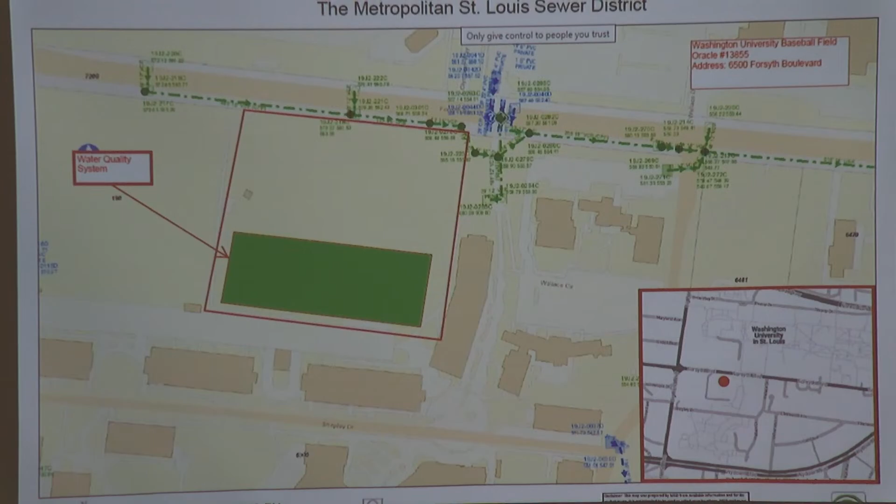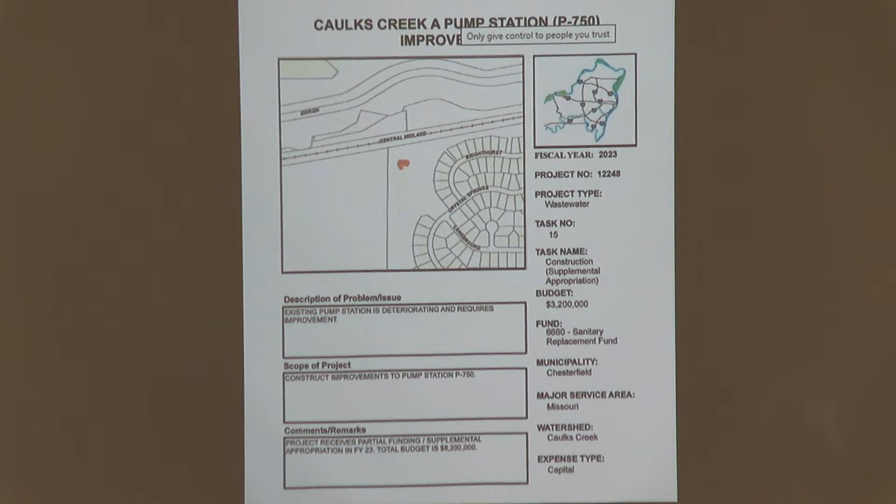The next is the Caulks Creek A pump station improvement. This appropriates additional funds to an ongoing construction project with Plocker Construction. This was a planned appropriation, it's the second year we've appropriated the project over 2 years. The work to be done consists of construction of a new submersible pump station and general upgrades to electrical and mechanical control systems. The purpose of this project is to replace and rehabilitate an aging pump station and the associated systems. Again, this is a partial funding request. This appropriation of $3.2 million will bring the total appropriation of the project to $8.2 million and fully fund the construction for the project.

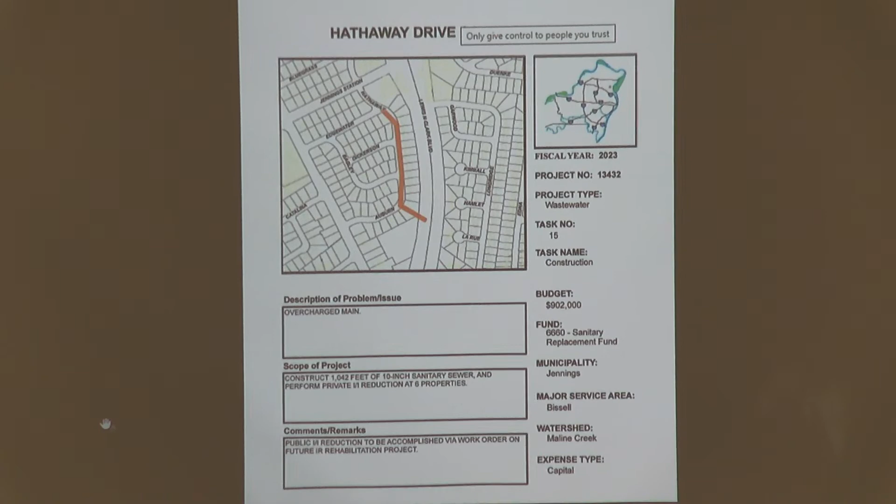Next project is the Hathaway Drive Sanitary Relief Project. This action appropriates funds and authorizes staff to enter a construction contract. The work to be done consists of construction of approximately 1,000 linear feet of sanitary sewers 8 to 10 inch in diameter. The purpose of the project is to alleviate wet weather surcharging of the sanitary sewer and reduce building backups. The district received 5 bids on this job.

The low bid was from Gershenson Construction Company. The bid was below our design estimate, and the appropriation of $1 million is just above the original budget for the project. Gershenson is committed to 17.12% African American participation on the project, which meets our 17% goal.

The next item is the Infrastructure Repair Rehabilitation Contract A project. This action appropriates funds and authorizes staff to enter a construction contract. The work to be done consists of rehabilitation of approximately 29,000 feet of sanitary sewers, varying in size from 6 inch to 72 inch in diameter using the cured in place pipe method. The purpose of this project is to reduce infiltration into and rehabilitate older, damaged, and deteriorated sanitary sewers throughout the district. Sewers identified for rehabilitation are identified through the annual CMOM inspection program required by the consent decree.

The district received 1 qualified bid for the project. We actually had 2. The second low bid was found to be non-responsive to the MWBE requirements. We went with the 1 qualified bid, from SAK Construction. The bid was slightly above the designer's estimate, and the appropriation of $2.9 million is above the original budget on the project.

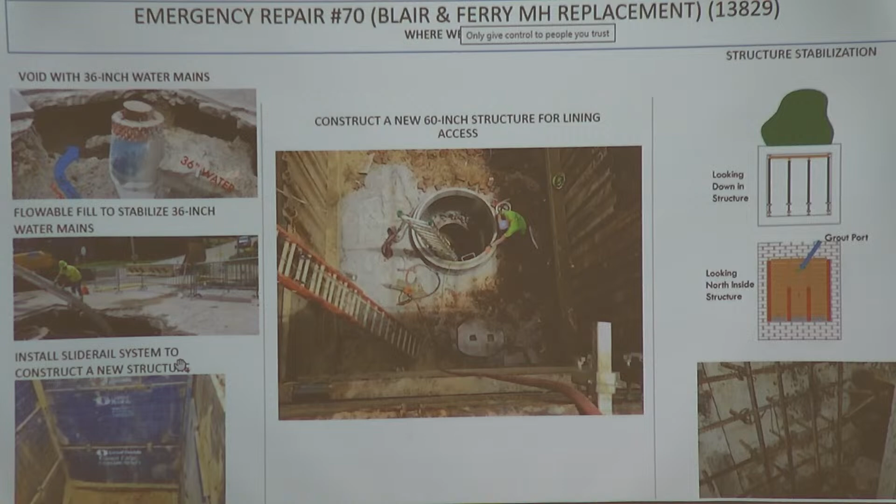The work under this appropriation consists of numerous items: excavation of an 18-foot diameter shaft, 36 feet deep, tunneling of two liner plate shafts to connect the 18-foot diameter shaft to the existing upstream and downstream sewers, bypassing the existing manhole structure, and several other items including backfill and restoration, replacing 4 inlets to be installed and connected to the new 48-inch manhole, and connecting an existing lateral to the downstream liner plate. This supplemental request of $2.5 million will bring the total appropriation on this project to $4.5 million. We also have some drawings on it.

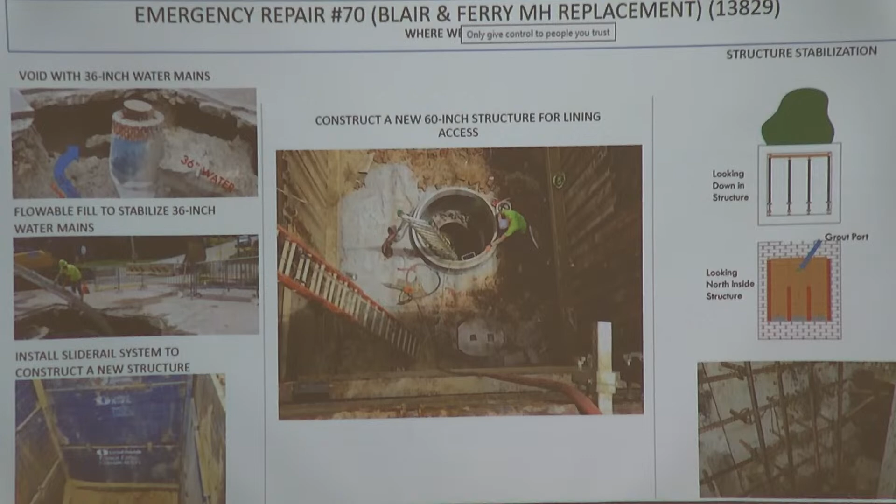On the first slide, it kind of shows the previous repairs that the district had made. Upper left was the original collapse, and there was some flowable fill put in to stabilize that. Working down on the left-hand side, the lower part is the shoring that was put in to make the repairs on the structure. The picture in the middle shows rebuilding that structure and moving forward. There's a few items that got cut off on the right.

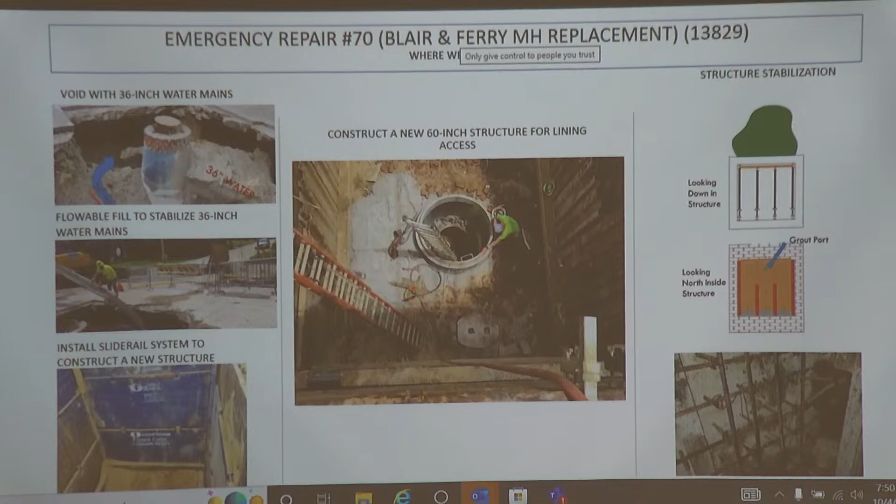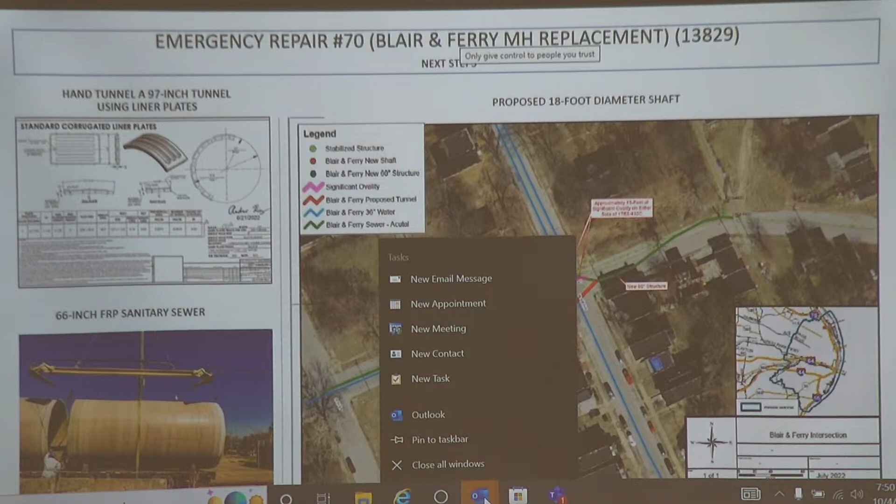On the next sheet is the plan of action for the sewers. Looking at the large picture on the right, there are 2 little highlighted sections, on my sheet it's purple. The sewers, which are supposed to be round, are starting to collapse and have become egg shaped, flattened out, which is a sign of imminent collapse. So that's what we're going to repair.

We've had some geotechnical work done in the area around that manhole, and in order to avoid the bad soil conditions, we're going to tunnel, which is the dark red line to the south. Basically, we're going to build a shaft in the middle and then tunnel in 2 directions from that and reconnect, then totally abandon that existing sewer, which is collapsing. That's what the $2.5 million is for. The bottom left shows the type of pipe we'll use once we put the liner plates in and reconnect that.

Hey Rich, how old is this sewer? Is it 100? What do we figure, 100? How many of those do we have out there?

I don't want to guess, but I'd say a good portion of the city of St. Louis was built in the early 1900s, particularly the older brick sewers, the larger diameter ones. This particular sewer was actually rehabilitated in the 70s, and we were able to locate some old plans that identified the issues they had with the ground conditions when they built this sewer, which causes it to snake around some of the bad conditions they had at the time.

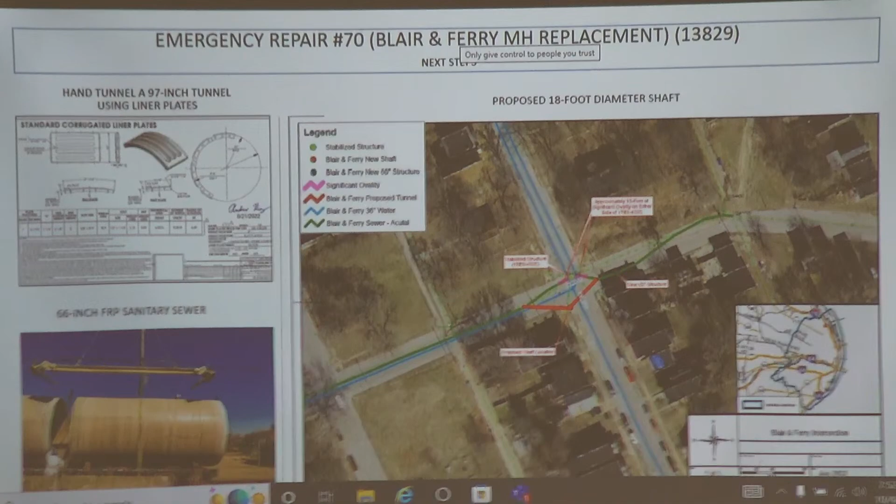Is there any way—do we have a good inventory of what's out there, and are we planning this into the CMOM program? Yes, we do investigations of them. Some of the more critical infrastructure, for instance those brick sewers within the floodplain of the Mississippi River that backs up, have already been reinforced and relined.

There are a lot of brick sewers around. Brick sewer was a good method of construction in the past. The problem is it really depends on the stability of the surrounding soils. A lot of things can happen—those soils, work above, groundwater changes. For example, leaking or partially leaking water mains can cause issues.

So we're in a process. We do an investigation going through and seeing what's there. Probably the best way to try and see if something's going on is trying to observe voids or other things happening outside the brick sewer. That's difficult to get to. We've tried different technologies over the last 15 years, and monitoring the shape turns out to be the best way we can get at it.

A lot of the worse ones I think we've taken care of, but this is still going to happen on occasion. So do we know there are more that are going to do this? Probably the best thing is for us to keep watching it. We don't just chase individual issues either—we evaluate whether we should be rehabbing longer stretches as a preventative measure. So it's a little bit of smart guessing as to where some of this is going to happen.

Rich was indicating the sewer system started in the 1860s, so it's been quite a while that some of this has been in place. But we have a program to monitor these things and replace or reinforce them. If it's not brick sewers, it's much more evident that something's getting ready to happen because of leaking, cracks, or movement. The brick sewers are a little bit different.

The overall project required a total of 5 easements. 4 have been acquired, leaving this one. Unfortunately, this one easement is the downstream section of pipe, and it's necessary to complete the project.

You do have a display on this one. It shows the easement adjacent to an existing home located on Barrett Grove. This is a situation we've talked about before.

We've made numerous contacts and left door hangers. The house is in a trust, which makes it hard to identify who to contact. The trust has an address but they're not responding to our contacts. We've been at this for months, and sometimes it just takes the condemnation letter to get some action out of the homeowners. So at this time we do anticipate that this would go to condemnation.

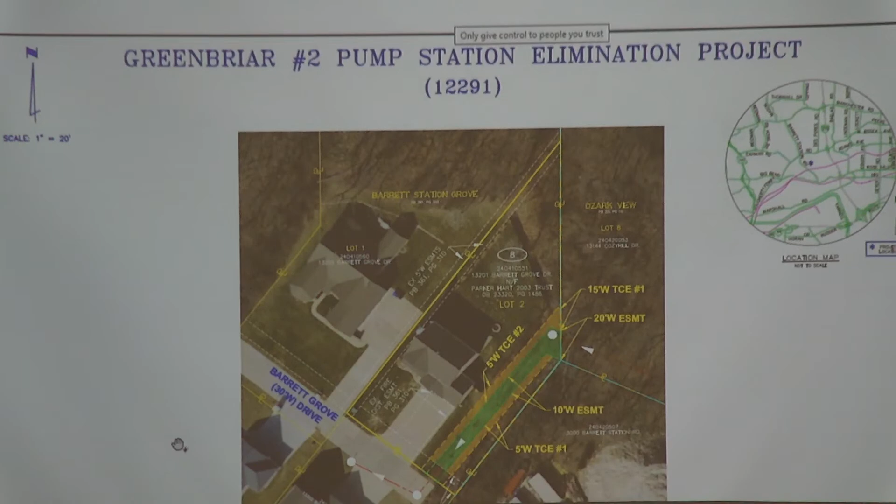All right, the next item is the Saylesville Sanitary Relief Project. This ordinance authorizes staff to proceed with further condemnation efforts, including the filing of all necessary court pleadings and documents for the acquisition of permanent and temporary construction easements on 6 parcels of ground in the city of Chesterfield.

The easements and temporary construction easements are needed to construct this project, which consists of approximately 4,000 feet of 8 to 18-inch diameter sewer and 690 feet of stream bank stabilization. The purpose of the project is to alleviate basement backups and surcharging of sanitary sewer, and to alleviate yard erosion at various residential properties within the system.

This project required 13 easements. Initially we acquired 7 of those, leaving 6 for condemnation. We continue to negotiate with the property owners. The first parcel, we've got that up there.

Parcel 4, we've made 7 contacts with this property owner over 3 months. We did meet with the property owner one time and explain the easement required at the back of their property, but we're just not getting a response from the property owner.

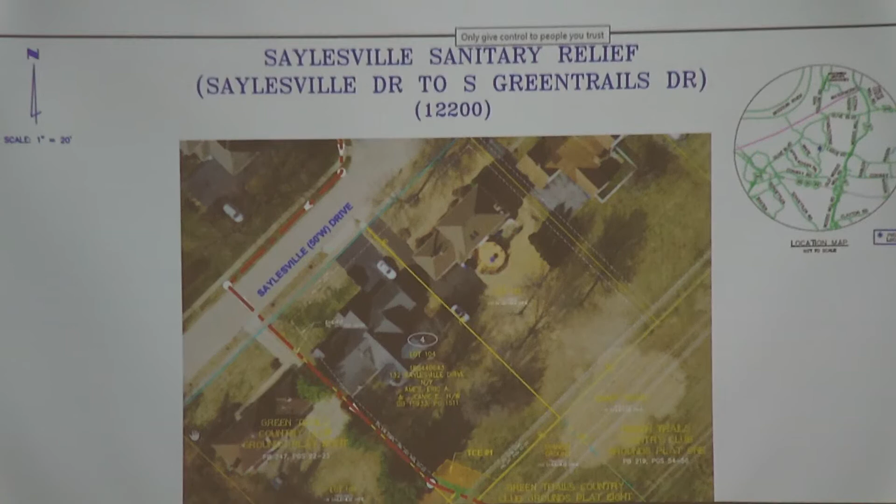The property owner indicated that he would sign the easement and get it back notarized, but it's been over a month and we're not getting any response out of him. We're not sure what the holdup is, and he's not returning our calls.

Next, parcel 25. This is a commercial property. We've spoken with the owner to go over the easement. We met with them, and the owners are concerned about loss of parking. We're trying to work that out. We've sent our appraisal to them, and they're having their attorney and their own appraisal completed on the project. In order to keep the project moving forward, we're requesting to move to condemnation.

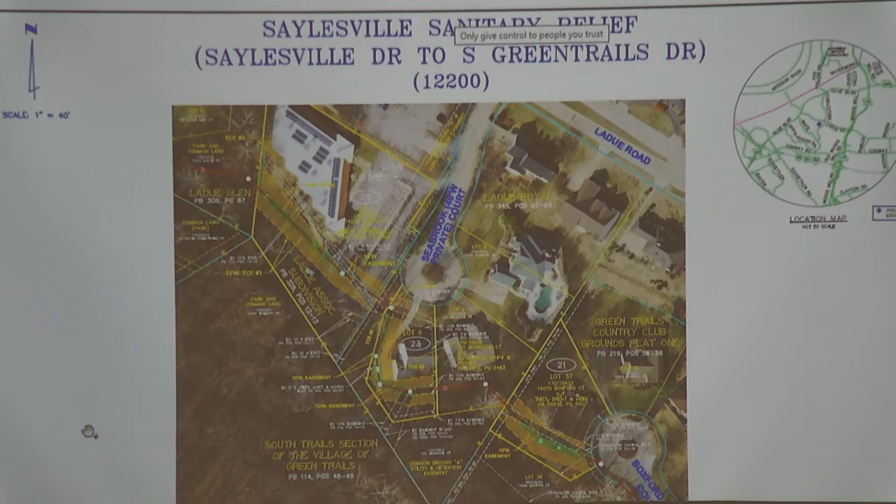The final parcel, number 34, is just a small piece on the upper left-hand corner of a property. This property owner, we've left 5 messages and stopped by the property, but we're not getting cooperation. It isn't much of an easement, but we would still be getting on their property to construct that last manhole on the project. So we're hoping to get that property going.

There's a lot of items to cover there.

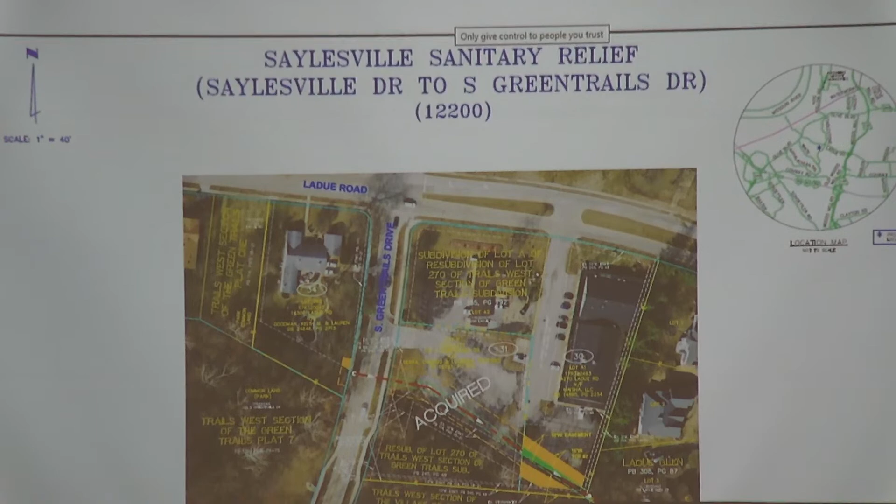All right, the next one is the WW2, WW3 Warson Woods Sanitary Relief Project. This ordinance authorized staff to proceed with condemnation efforts and the filing of all necessary court pleadings and documents, leading to the acquisition of permanent and temporary construction easements on 9 parcels located in the cities of Glendale, Rock Hill, Warson Woods, Ladue, and Kirkwood. Easements and temporary construction easements are needed to construct approximately 10,600 feet of 8 to 24-inch diameter sanitary sewers at various residential and commercial properties to provide for the elimination of 3 constructed sanitary sewer overflows per the consent decree.

On this particular project, there were 55 easements required, so we've made pretty good headway. 46 have been acquired, leaving these final 9 for condemnation. We're continuing to negotiate, and I'll briefly go through these negotiations right now.

First parcel is parcel 19 - a little bit out of order here. This property owner is represented by an attorney. That attorney will typically not engage until after the district proceeds to condemnation. We do anticipate on this particular property to go to condemnation.

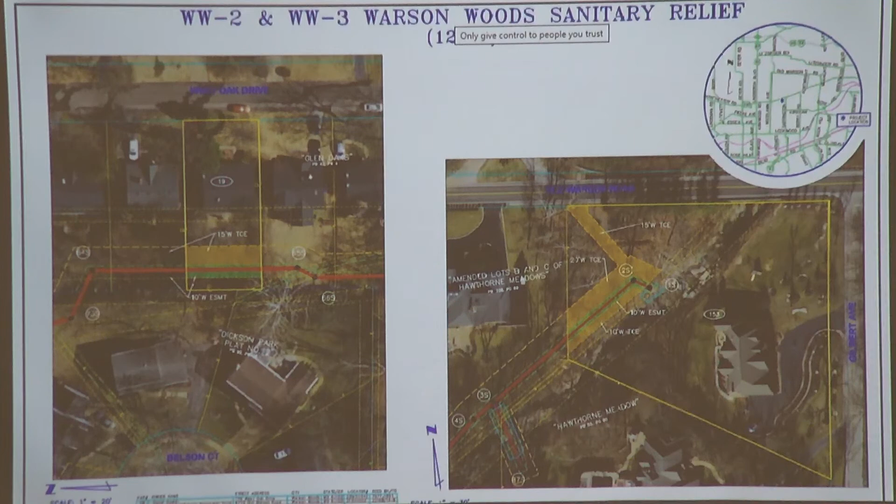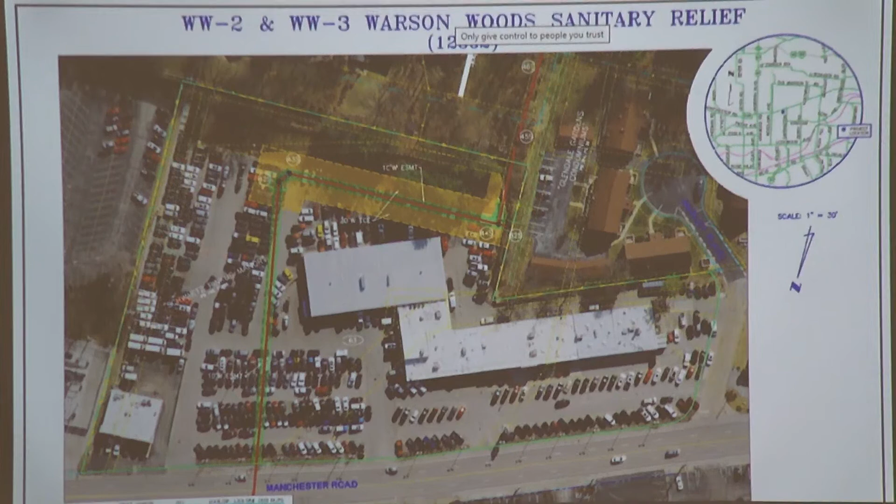Next parcel is parcel 63 - let me get my notes here. That is right on Manchester, the Glendale Chrysler Plymouth. We've met with them numerous times. They actually have a plan to redevelop, so we've worked numerous alignments on the property. There's a portion, not shown here, of some sewers that are under an existing building now, so we're working out encroachment agreements for those sewers. We feel like right now we're close to reaching an agreement with them, so we do not anticipate going to condemnation, but we want to proceed with all the other properties just in case the negotiation falls through.

Parcel 86 and 87, those are commercial properties, again along Manchester Road. We have engaged this property owner. There are some complex issues because the alignment on the Glendale Chrysler Plymouth has changed a few times, so it impacts where it crosses Manchester and gets onto his property. The owner's still kind of getting his feel for it, and they're just not engaging with us in discussions to try to coordinate. A lot of times on these, we'll work with the property owners - as you can see, we're going through some of their parking areas, trying to arrange and reach agreement on when we can work there and when we can't, which often requires going into condemnation negotiations with the property owner.

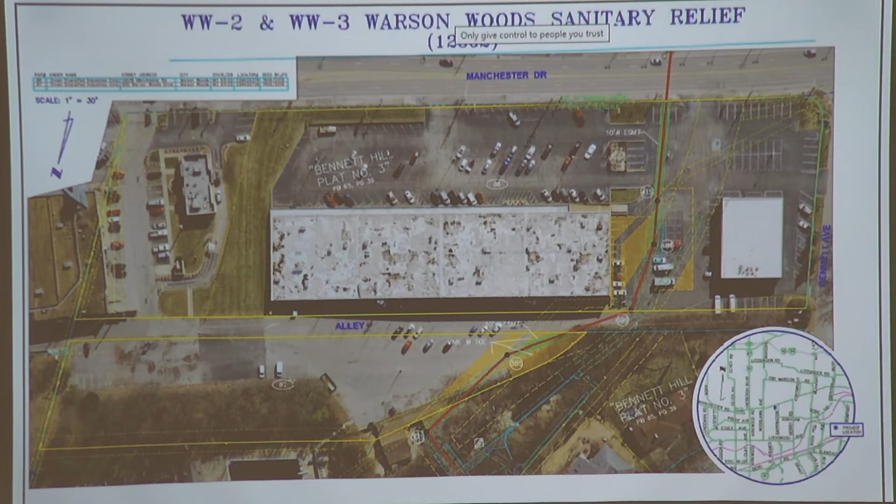Next parcel's 85. The owner's not responded - well, the owner, we actually did just reach out, and they finally reached back to us. Based on our initial conversation, we do feel like we're going to be able to agree and don't anticipate going to condemnation.

Parcel 99 on the upper right-hand corner, the owner is represented by an attorney. We've exchanged information with that attorney. The attorney indicates that the property owner is willing to negotiate, and we don't anticipate going to condemnation, but we're proceeding in order in case those negotiations fall through.

Parcels 100 and 101, we've met with both property owners. One is represented by an attorney, and we've exchanged that information. As you can see, there's a trend here - once one neighbor ends up having an attorney, they talk to the other neighbors, and the attorney is able to secure them as a client to work with MSD. For parcel 100, we do not anticipate going to condemnation, but unfortunately parcel 101 has broken off their discussion with us and will not talk to us.

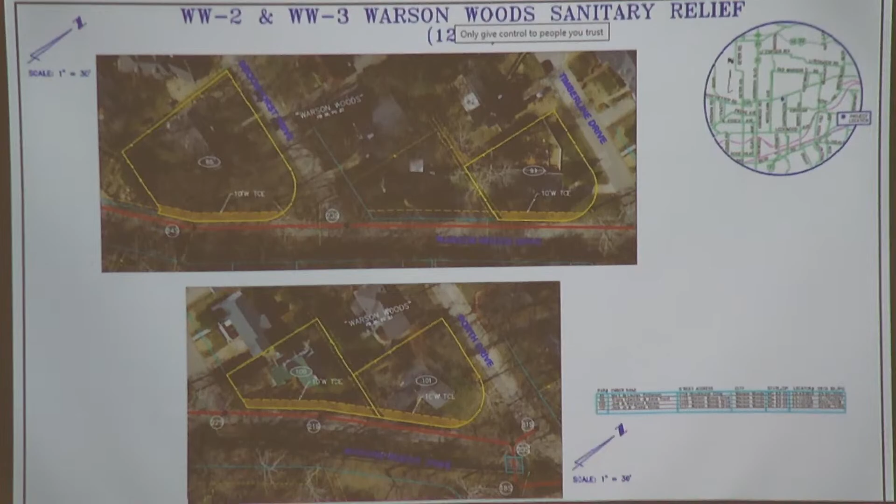So overall, when you've got 55, I think we've done a great job getting down, but hopefully we'll get these very complicated projects weaving into neighborhoods, and then obviously the complexities of working around commercial properties. But the staff works very hard. Very seldom do we actually even have to go to condemnation, but we do request that permission from the board. Any questions on that one?

All right, the next one is actually a request for condemnation for a property acquisition, purchasing of a property. This ordinance authorizes staff to proceed with the purchase of property necessary for the project, and to use further condemnation efforts for the filing of all necessary court pleadings and documents leading to the acquisition of one parcel of ground located in the city of Pagedale, to allow the area necessary to accommodate the construction of a sanitary storage tank, pump station, and collection sewers. This project will alleviate wet weather building backups and overcharged sanitary sewers.

This particular piece of ground in Pagedale, we came back in 2016 and acquired 2 parcels of ground for this. We're in the design, it's a design build project, we're in the preliminary design. Based on the preliminary design, we need another parcel of ground. We've started those negotiations with the property owner and can't reach an agreement for this purchase. So we're coming to the board for permission to purchase this property and to proceed to condemnation efforts if possible. Once we reach that agreement, we would come back to the board in closed session to discuss the actual purchase.

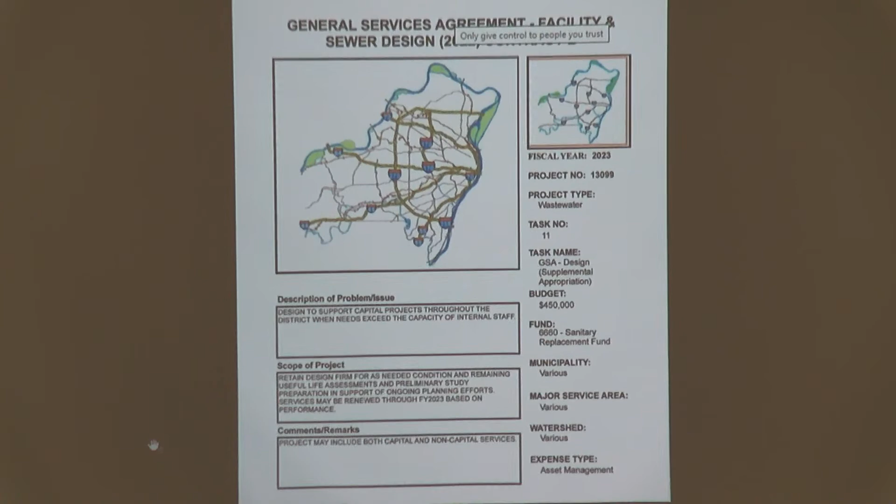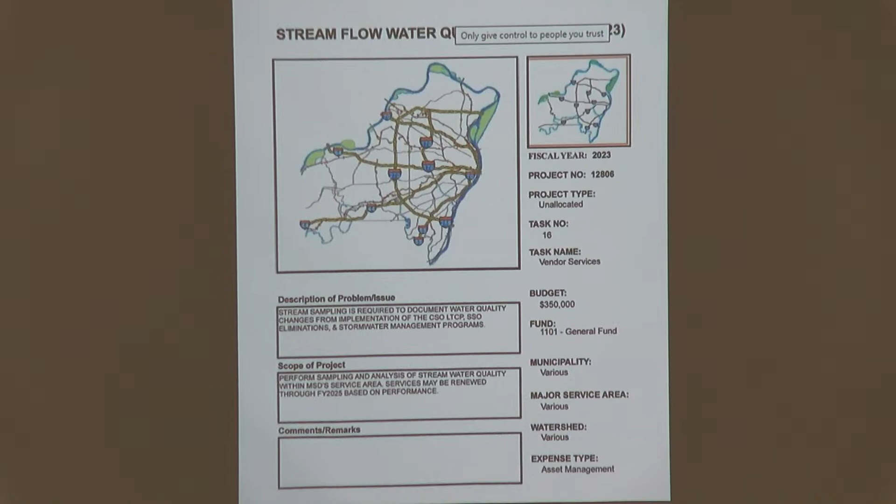All right, the next several items are new engineering design contracts for projects that we have planned to construct over the next several years. First is the BC01 Phase 3 and BC02 Phase 2 projects. BC stands for Black Creek. This appropriates funds and authorizes staff to enter into a design contract.

This ordinance authorizes the district to enter a contract with Lockwood Andrews Newnam Associates for the design of this project. It is a lump sum cost project to design approximately 13,000 feet of 8 to 30-inch diameter sewers. The purpose of the project is to alleviate wet weather building backups and surcharged sanitary sewers. This project will provide for the elimination of 4 constructed sanitary sewer overflows. The construction cost estimate of the project is just under $10 million and anticipated to begin construction in our fiscal year 2027. There were 2 other proposals considered on this project.

The appropriation of $1,545,000 for design services is $160,000 below the proposed budget funding that we had in the project. Lockwood is committed to approximately 51% MWBE participation for various services with the 3 firms listed. There is no MWBE goal on this project.

Next project is the Glen Echo Sanitary Relief. This appropriates funds and authorizes staff to enter a design contract. This ordinance authorizes the district to enter a design contract with Civil Design Incorporated for design of this project. It is a lump sum cost project for the preparation of construction documents to construct approximately 6,200 lineal feet of 15 to 21-inch diameter sanitary sewers and appurtenances.

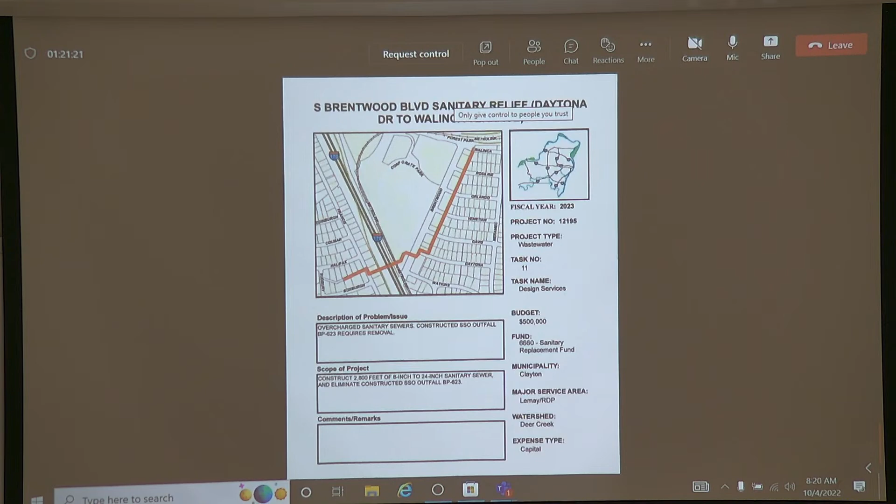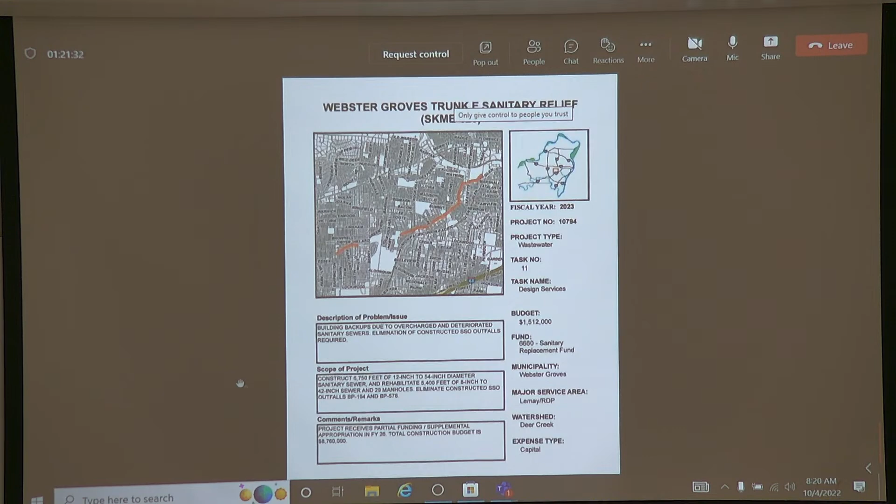Last item is the Webster Groves Trunk East Sanitary Relief project. It appropriates funds and authorizes staff to enter a design contract. This ordinance authorizes the district to enter a contract with Burns and McDonnell Engineering Company for the design of the Webster Groves Trunk East. It is a lump sum cost project for the design of 6,750 feet of 12 to 54-inch diameter sewers. The purpose of this project is to alleviate wet weather building backups and overcharged sanitary sewers.

This project will provide for the elimination of two constructed sanitary sewer overflows. The construction estimate for this project is approximately $8,760,000, and construction is expected to begin in our current fiscal year 2026. There are two other proposals considered on this project.

The appropriation of $1,324,000 for design services is $188,000 below the proposed funding for the project in the current capital improvement program. Burns & McDonnell is committed to just under 32% MWBE subcontractor participation with the firms provided. There's no goal for the project, so they're exceeding that goal.

That concludes the agenda items. Are there any questions from any of the members?

We do, or I don't know if he's on mute. Trustee Nicholson, would you like us to go on to other business? Yes, I didn't know if he was on mute. All right, I was just figuring you were going to go right into it since you mentioned it. No problem, I didn't want to get started if you weren't ready. All right, no, all right, next item under other business.

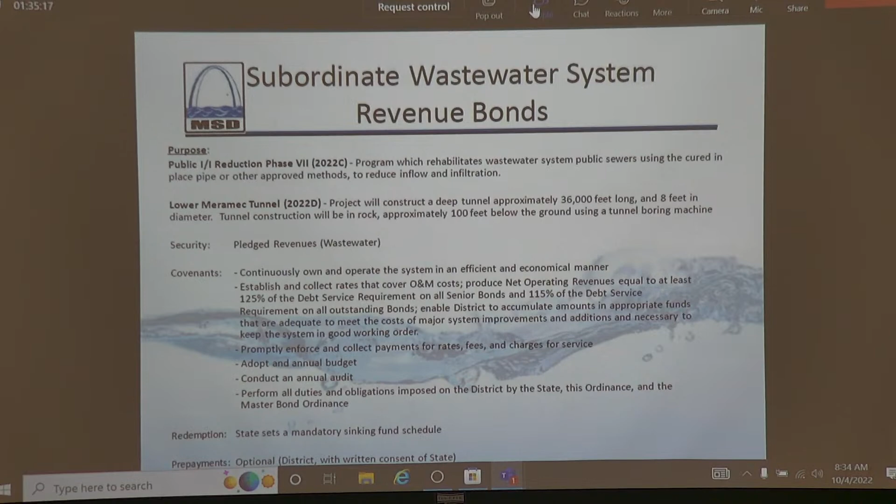There will be a pledge of revenue that secures the loan. The state will set a sinking fund schedule. Expected financial terms are on the next page. These loans are usually 20 years, and they will be.

We've set the model rate in the ordinance right now at 1.50. That's a little bit higher than where the rate actually is. That'll give us some room in the next few weeks as we get this closed if rates move up a little bit. But right now the rates are about 1.29. They have actually not been that high in the last 3.5 years for these kind of loans. There'll be a 50 basis point, or 0.5%, annual admin fee added on top of that.

We've got about $800,000 of cost of issuance from these two loans, and then we'll have to start paying these back already in '24 and '25 in small amounts. These are kind of set like mortgages where you have principal and interest payments regularly. That schedule is on the next page. I won't spend a lot of time on those, but combined we'll have about annual outlays of about $8 million in principal and interest over roughly 20 years to pay these back.

Just to give you an idea on the next slide of what kind of debt authorization we still have remaining: we did have $900 million approved by voters in 2016, another $500 million in 2021. Prior to these loans, we have about $750 million still available. After these, it'll be more like $630. The bulk of that $630 is going to be taken up by the fluidized bed incinerator, so that will be coming out over the next couple of years. So probably by the end of next year, we're going to have very little debt authorization remaining.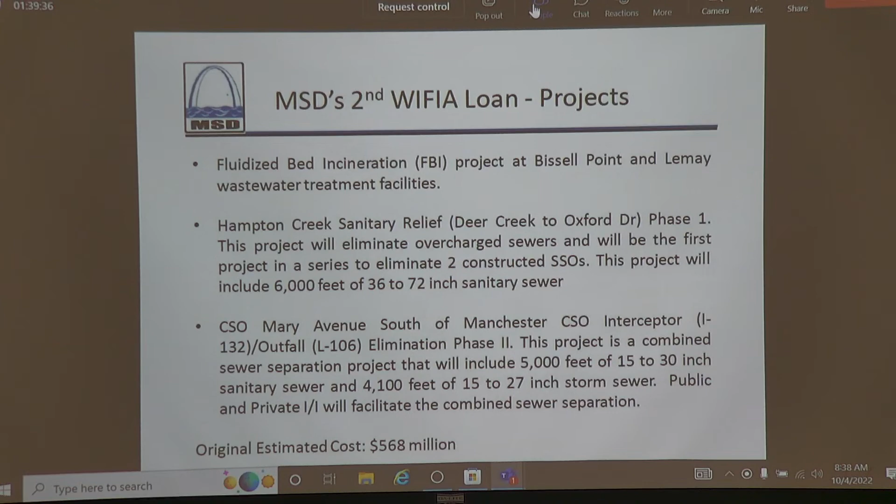Good morning, trustees. I have a resolution on the agenda for Oracle EBS support services. This action is necessary to authorize a contract with Rimini Street for software support, patching, and security services on our legacy Oracle EBS system, which we're currently moving to the cloud, but we have to support the existing system. This IT contract is for $190,000, and this resolution will authorize the district to renew option year 1 of 1 with Rimini Street. It'll run from December 22 to December 23. Are there any questions on this resolution?

I thank you. Great. Marion?

Thank you, Tim. The next item is a resolution requesting a transfer of $3 million from our general fund to our wastewater emergency fund. It relates to two projects that Rich discussed earlier, totaling $2.9 million, proposed to be funded out of our wastewater emergency fund. With emergency funds, we don't budget specific projects because we bring those to the board as it becomes necessary. So this $3 million transfer will allow us to fund those two emergency projects that Rich mentioned earlier. Are there any questions?

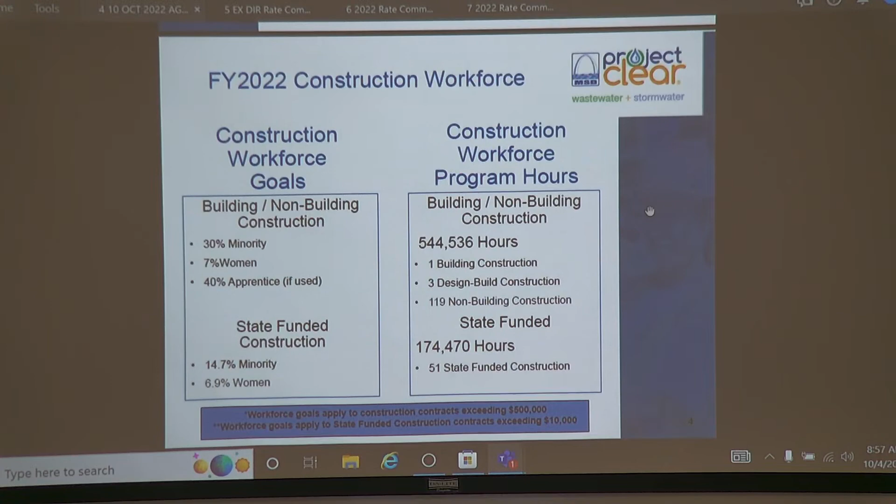This next slide will give a breakdown of the percentages for our workforce numbers. The total hours of minority participation was 27.29%. Women participation was 7.4%. The chart also measures 30% minority and 7% women workforce goals across all of our construction projects, including the state-funded projects with the lower workforce goals.

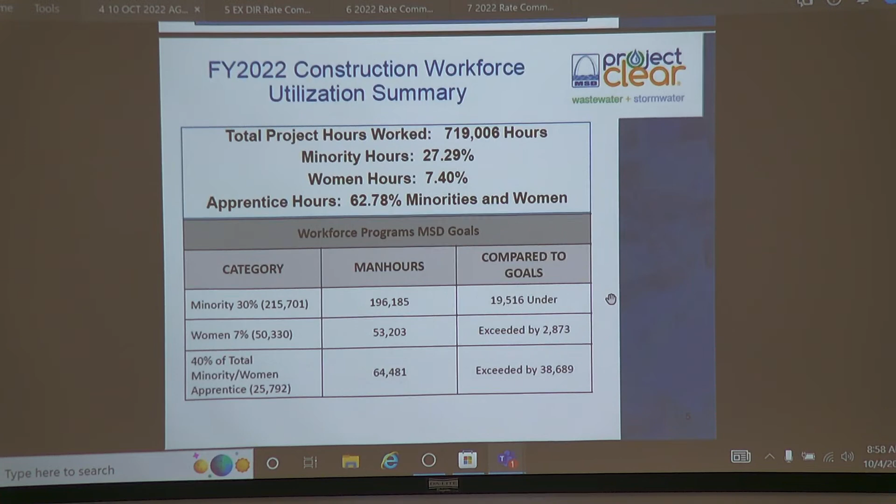And you'll see a slight shortfall due to the lower state-funded projects, but overall, we continue to see very good participation with all of our contracts having met workforce goal participation. And in terms of the training that's taking place, overwhelmingly, we continue to see numbers upward of 60% for minorities and women on our projects.